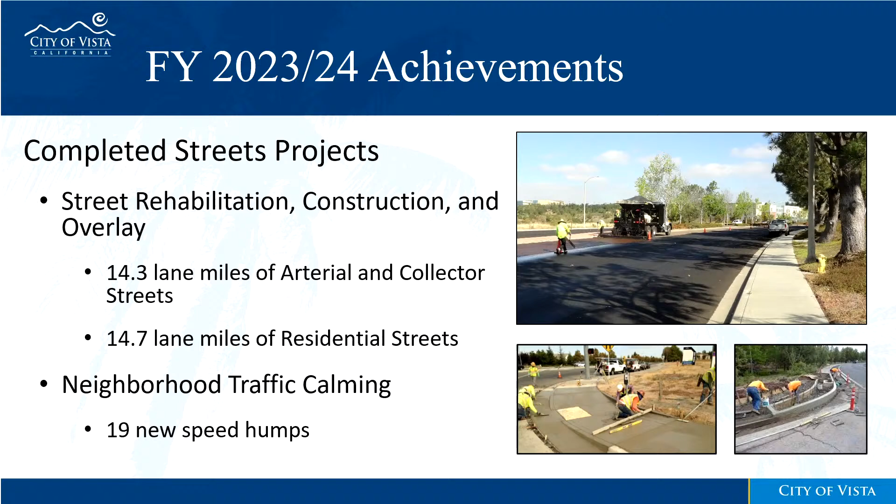Completed drainage projects include Phase 1 of both the citywide CMP replacement project and Bobolink storm drain project. Both of these projects have been funded through the city ARPA allocation. The CMP replacement project replaced 576 linear feet of deteriorated corrugated metal pipe with reinforced concrete pipe. The Bobolink storm drain project installed 380 linear feet of new storm drain.

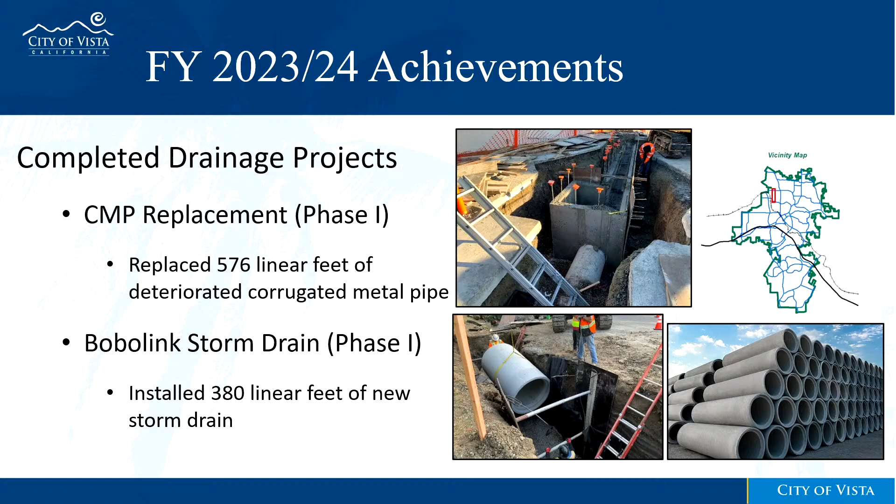Completed sewer projects include the Laurel Creek Sewer Improvement Project, which rehabilitated 4 sewer manholes to reduce inflow and infiltration of stormwater into the sewer pipelines adjacent to Laurel Creek. The Buena Outfall Manhole Rehabilitation Project improved 43 manholes with cured-in-place fiberglass composite liners or epoxy lining technology, which extends the useful life of the system by 25 years.

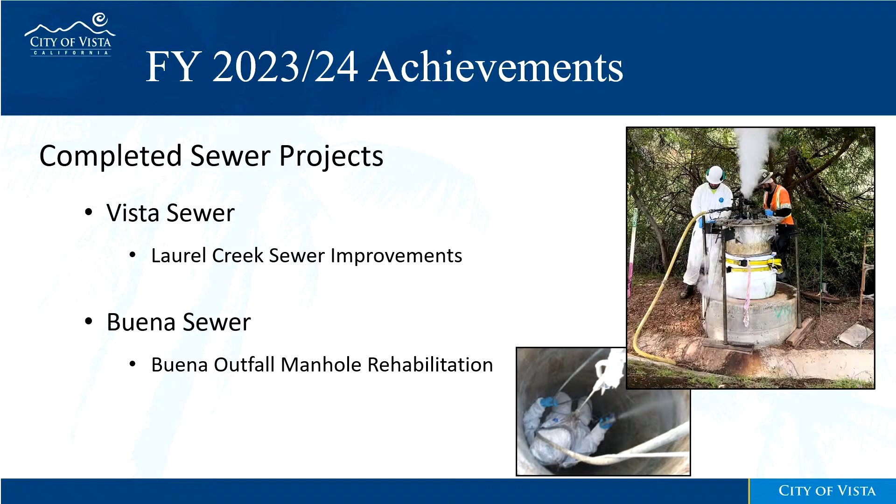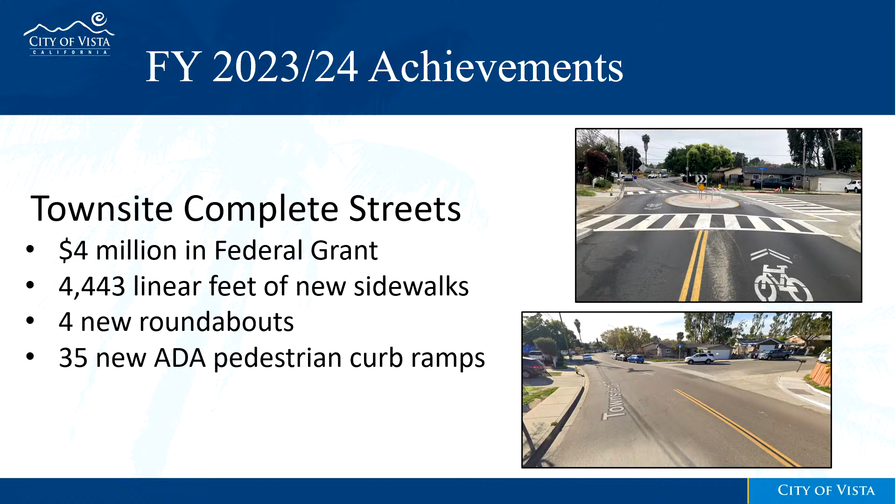There are 6 proposed new projects for fiscal year 24-25. The CIP budget detail sheets for these projects are included in Exhibit 2 of the staff report.

Paseo Santa Fe pedestrian improvements will provide for the design and installation of push-button activated rapid rectangular flashing beacons and LED light-embedded pedestrian warning signs at the 4 crossings located on South Santa Fe Avenue between Eucalyptus Avenue and Pala Vista Drive. This project is anticipated to cost $150,000 and will be funded by general funds earmarked for street projects.

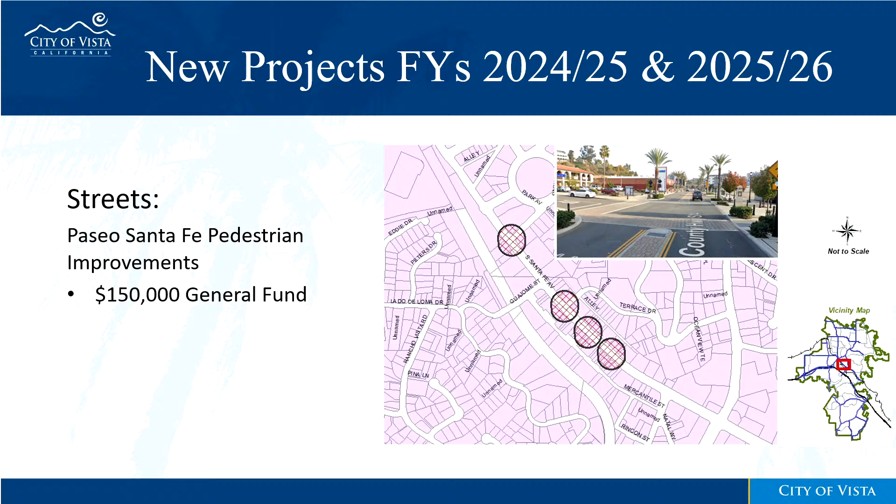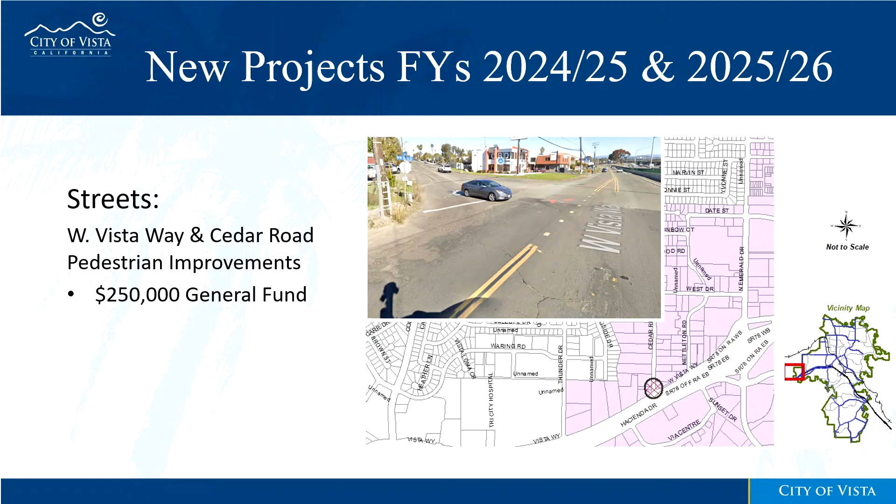The West Vista Way and Cedar Road pedestrian improvement project will complete a missing sidewalk segment on Cedar Road, install an ADA curb ramp on the intersection corner, build a raised crosswalk across the intersection, and construct a raised pedestrian path on the south side of West Vista Way to connect to the bus stop. This project is anticipated to cost $250,000 and will also be funded by the general fund.

The Civic Center and Pala Vista Drive pedestrian improvements project will address a safety concern. The intersection of Civic Center Drive and Pala Vista Drive is preempted by Sprinter trains traversing through the nearby railroad crossing. This project will install what is known as a queue cutter traffic signal at the tracks to ensure the northbound traffic on Civic Center Drive does not back up onto the tracks, thereby reducing the time needed to clear them and give more time to pedestrians' movement during the preemption. This project is anticipated to cost $650,000 and will also be funded by the general fund.

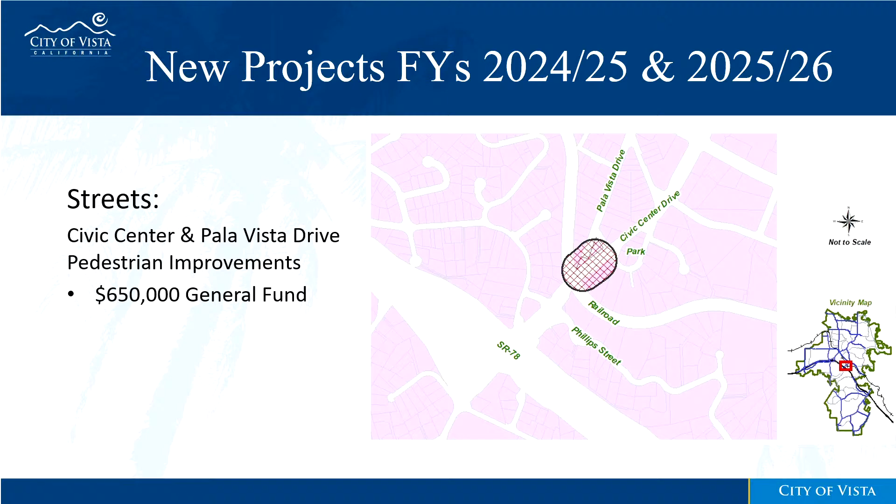In sewer projects, the Via Centre Capacity Improvement Project will replace and upsize approximately 650 linear feet of trunk sewer main running from West Vista Way under Highway State Route 78 and down Via Centre, and reconstruct and rehabilitate associated manholes. This project will address a known capacity concern, and appropriations of $600,000 are proposed from Vista sewer fees.

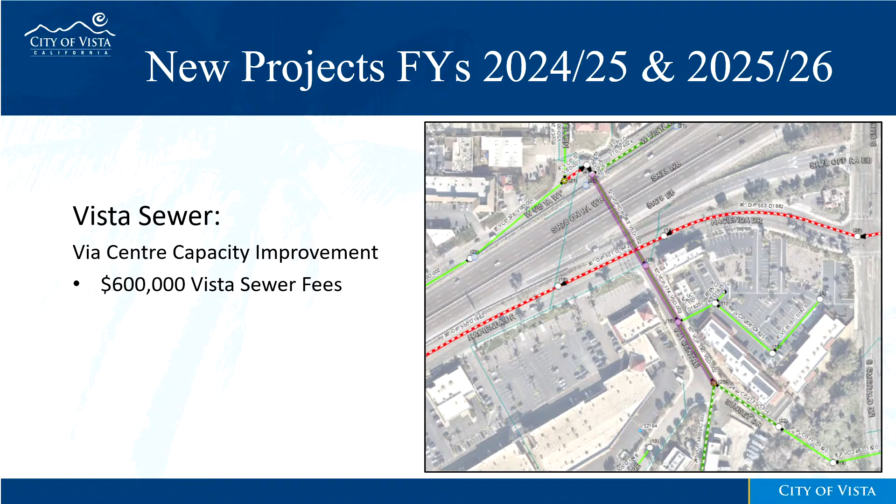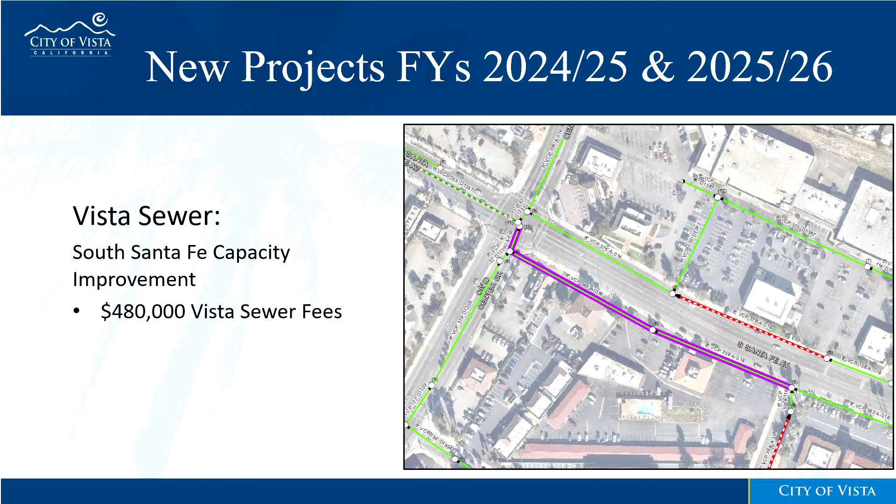The South Santa Fe Capacity Improvement Project will replace and upsize approximately 750 linear feet of collector sewer main running along South Santa Fe Drive near Civic Center Drive and reconstruct and rehabilitate associated manholes. This project will also address a capacity concern, and appropriations of $480,000 are proposed from Vista sewer fees.

The Buena Outfall Cured in Place lining project will rehab approximately 460 linear feet of the Buena Outfall sewer interceptor located near Paseo del Norte in Carlsbad, utilizing cured in place lining technology to mediate minor damage identified during a 2023 CCTV inspection. Appropriations of $1,095,000 are proposed from Buena Sanitation District sewer fees.

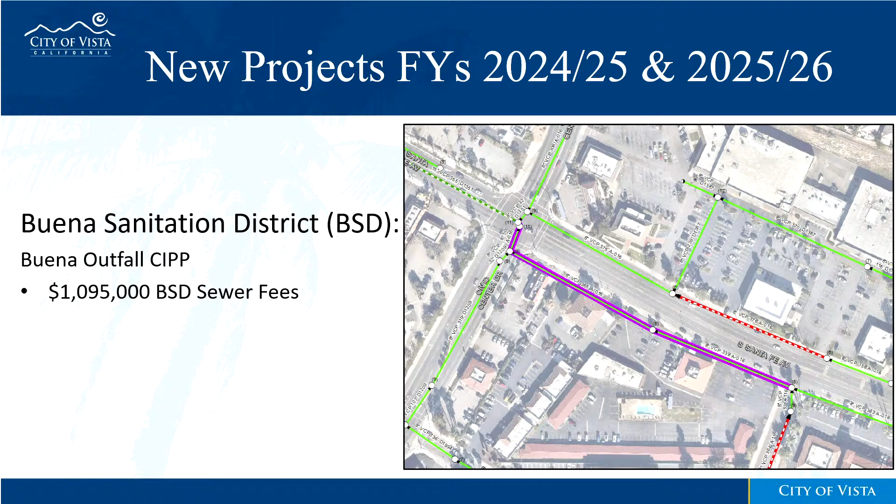In addition to the 6 proposed new projects, a number of new CIP projects were added to the CIP this last fiscal year, primarily from year-end fund balance. Some of these projects include the installation of 3 traffic signals, funding for the design of 2 roundabouts on Beaubier Drive, and funding designated for property acquisition for a future homeless shelter. A comprehensive list of current CIP projects can be found in Exhibit 4.

Of the 60 existing projects appropriated in previous fiscal years and anticipated to be carried forward to fiscal year 24-25, 18 have new appropriation requests totaling $54 million. Detail sheets for ongoing projects with new proposed appropriations are included as Exhibit 3 in the staff report.

These projects include Phase 2 for the Senior Center, which will include new flooring, paint, cabinetry, an automatic sliding door, improved landscaping, new retaining wall, shade structures, and roof replacement. Phase 2 is anticipated to cost approximately $862,000 and is being funded primarily through ARPA funds.

$100,000 from public facility fees is proposed to continue making ADA improvements for public parks and public facilities.

New appropriations are also proposed for the Fire Station 3 replacement project. Due to bids coming in significantly over the original budget, an additional $4.9 million is being proposed for this project: $592,000 from underground utility fees, $350,000 in available fire development impact fees, and staff is proposing the remaining need of just over $4 million be funded by the Proposition L Reserve.

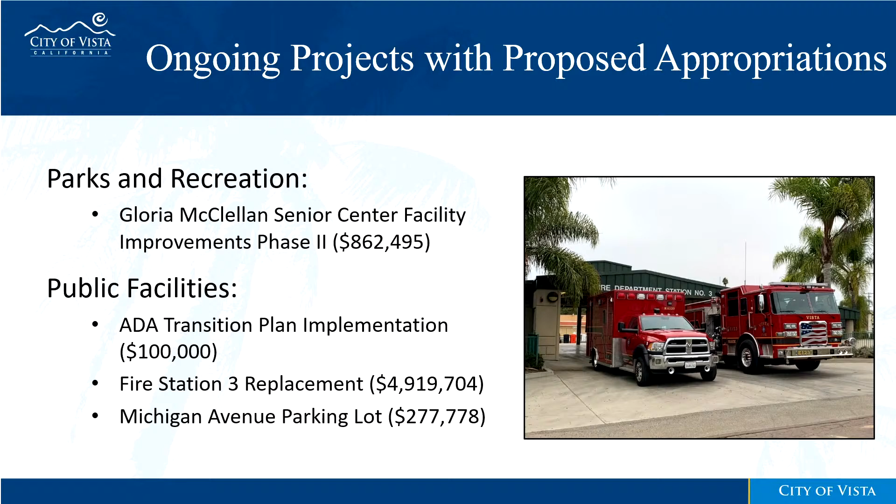An additional $277,000 is proposed for the Michigan Avenue parking lot from public facility fees to fully fund the project. The project is in the pre-design phase with construction anticipated to start this next year.

About $13.7 million of proposed increases for ongoing projects for the next 2 fiscal years are for street projects. Almost $5 million is for street rehab overlay and $2.1 million for slurry seal maintenance. Both of these projects are funded by the Transnet half-cent sales tax. $5.1 million is programmed for overlay and slurry seal specifically for the most deteriorated residential streets. This is funded through the SB1 road repair gas tax.

An additional $1.2 million is proposed for construction of new sidewalks, funded primarily through the CDBG allocation. Additionally, $350,000 is proposed from traffic impact fees for a pedestrian traffic signal at Washington Street for the North Santa Fe Complete Streets project. This project also includes landscaping and irrigation improvements and approximately 125 new trees, funded through a federal grant of $1.59 million, which the city was awarded this past year.

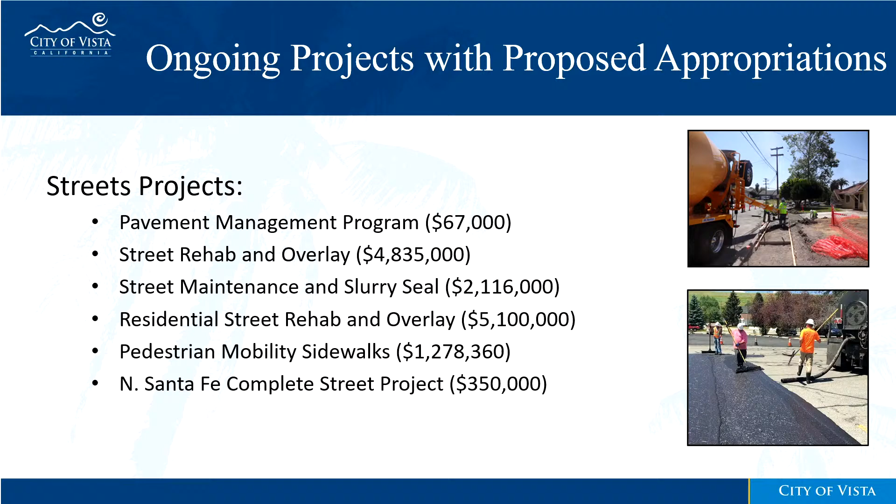For traffic signals, $150,000 was originally allocated for improvements at the intersection of North Melrose Drive and Ascot Drive this past November with year-end fund balance. Council discussed this intersection again at the meeting on January 9th and gave direction to add a traffic signal. An additional $600,000 is being allocated from traffic mitigation fees and RTCIP fees to fund the traffic signal.

For drainage projects, an additional $2.6 million is proposed for the California mandated trash cleanup device installations project, to continue to install trash capture devices throughout the city-owned storm drain system.

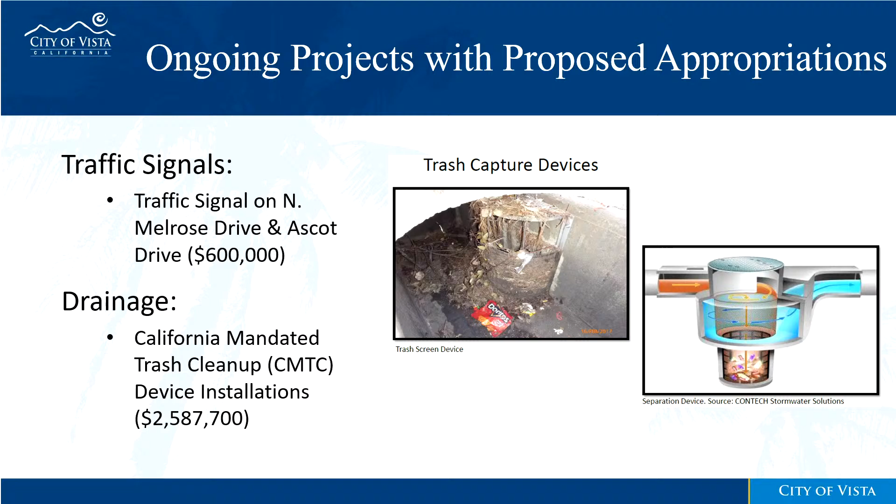Other changes include 2 years of contributions to the Encina Wastewater Authority Capital Improvement Project in the amounts of $19.7 million for the City of Vista Sewer and $5.7 million for the Buena Sanitation District. The Encina Wastewater Authority provides sewage treatment for 6 member agencies, including the City of Vista and Buena Sanitation District. In addition, $1.5 million is proposed for Vista Pipeline Rehabilitation and $1.7 million for Vista Carlsbad Interceptor Rehab, both funded by Vista Sewer fees. $2.25 million for the Vallecitos Fail-Safe Outfall Project will be funded by the Buena Sanitation District fees.

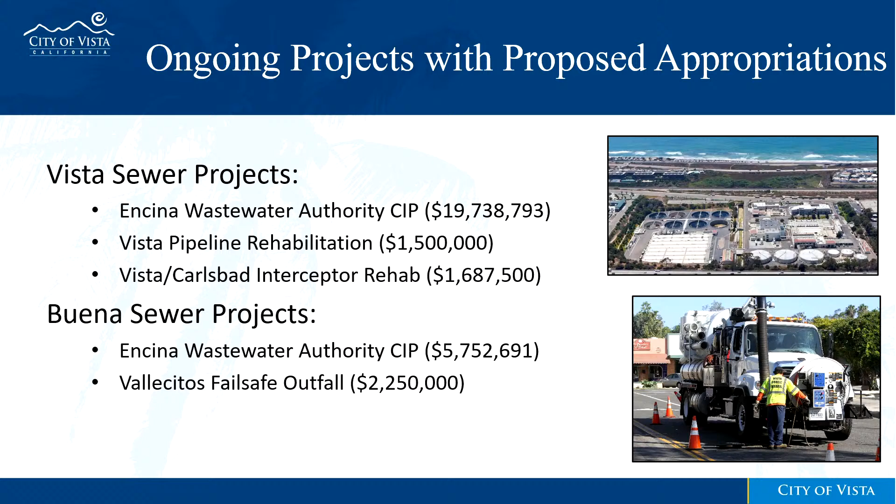City Council direction will be included in the capital improvement program budget that will be brought to the City Council for consideration in June, and staff is available for any questions.

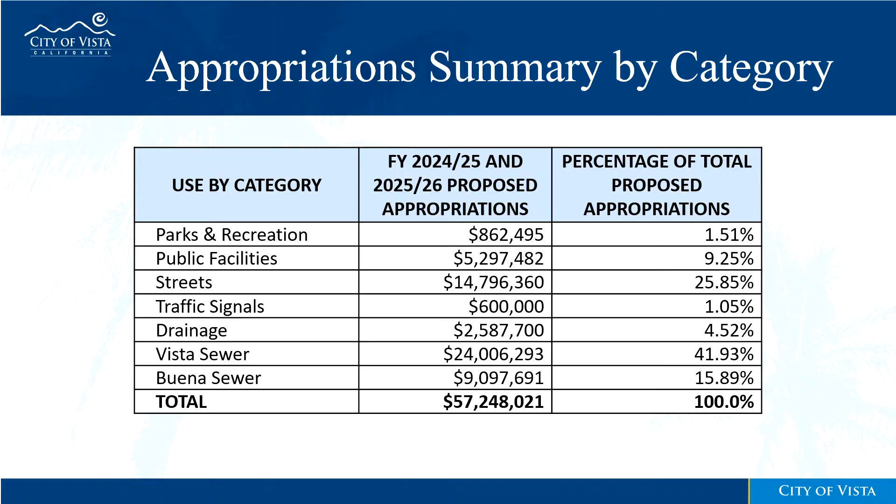All righty. Thank you so much for putting together all the information in a concise manner and for all the work that is done to maintain the city and then to take it to the next level and make it even better, right? I do have a few questions.

Let me find the pages. Okay, so starting first with the Paseo Santa Fe pedestrian improvements, the $150,000 coming from the general fund. You said that these improvements are the flashing beacons. Can someone just go over what the improvements are going to be one more time?

Yeah, so that is for the flashing beacons, and it's at 4 crosswalks. So at Ocean View Drive, Terrace Drive, and then at 620 South Santa Fe and 657 South Santa Fe.

I'm just going to jump in and explain what we're doing here. Along Paseo Santa Fe, where we put in the roundabouts, we have a number of pedestrian crossings that are unsigned. Our estimation when we put the project in was that traffic would be going slow enough and there'd be enough visibility that we wouldn't have to sign them, but we're finding that there's still some concerns for safety. So we want to put up the flashing beacons.